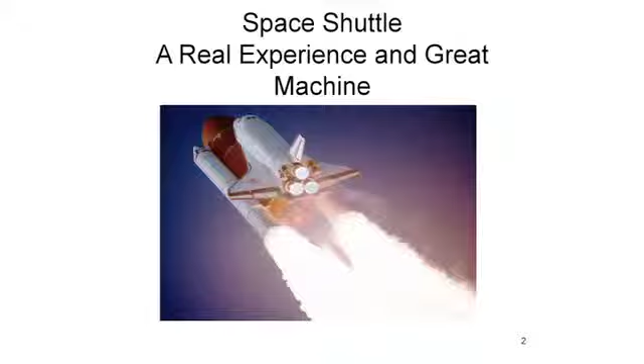This machine is absolutely fantastic. And the big part is to have worked on it from sketchpad to launchpad was the experience of my life. I never told anybody this, but the last 2 years I would have worked for free because I had the honor of starting it in 1969.

And it was each one of the phases, so I'm going to talk to you a little bit about each one of the phases and how important that is and how they're all different.

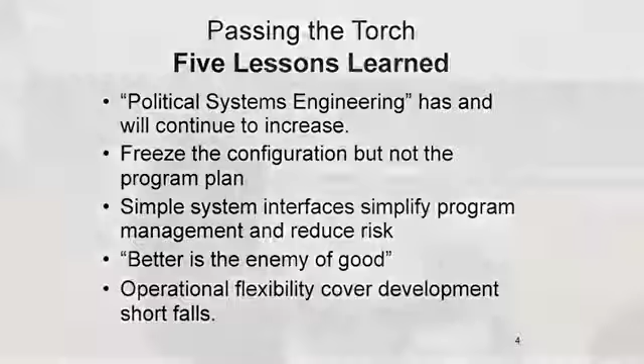Then I'll talk about each one of these 5 things: freezing the configuration but not the program plan; simple interfaces really simplify the program; better's the enemy of good; and operational flexibility covers a lot of shortfalls. Now I'm going to talk about each one of these things.

In the development, transitioning from Apollo to shuttle, there was a huge difference in technology. In Apollo, we just didn't even know what we didn't know. We hadn't even put a man in space. Shepard had gone up and touched the edge of space when Kennedy said we're going to do it. There was so much - we had propulsion systems, guidance and control systems, we didn't know if people could live in space, we didn't know how to rendezvous and dock in space, we didn't know diddly, okay? But we said we think we can do it, and we did it. So there was a huge technology difference.

In the early shuttle program, we looked at a lot of different configurations. We froze those configurations early in the program, and then we stepped into, okay, how do we make this better by simplifying the interfaces and moving into operations.

In the political and program management, the political environment changed a whole lot. There was not - and this was living in the glory days - I mean, we didn't have oversight and a lot of bureaucracy. It was just go get the job done. We had a lot of support at all levels, and that made the job - I don't think we'd have gotten there with all the challenges we had if we hadn't had that environment to work in.

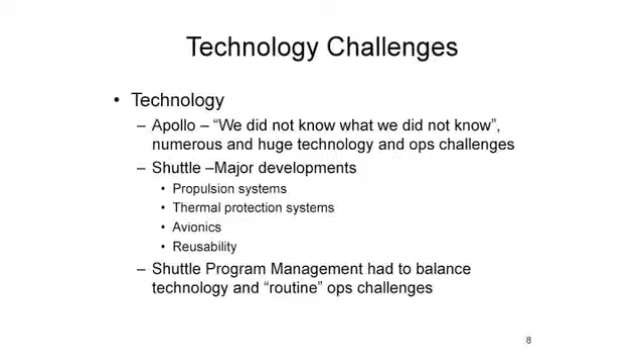But then we had to balance it between something that's a single event and something that's routine ops. John O'Neill will talk more about that.

It wasn't an issue keeping the program sold in Apollo or shuttle, but it was a continuous challenge. One of the big differences between Apollo and shuttle was that Apollo had things happening all the time. There were launches, failures, events. The public could see it, and it was exciting to everybody. In shuttle, this thing drug along for a long time. We in the program felt great because we were making progress, having design reviews, things were coming about, we were doing subsystem tests and they were working well. But nobody saw that, so it wasn't exciting. We didn't have any gee whiz.

Until 78, I think, is when we did the approach and landing test. Is that right, John? About 78? Yeah, that was a gee whiz. That wasn't in the program initially, but when we saw that orbiter on the back of the 747, it was a good engineering management test objective, but the biggest thing was it was a visible thing that got the excitement going. The program was about to get canceled, literally. We were right on the verge of that program dying. But when that happened, all of a sudden it was, get that thing in space. As a matter of fact, that's what John Yardley said: get that son of a bitch in space, I want that to go.

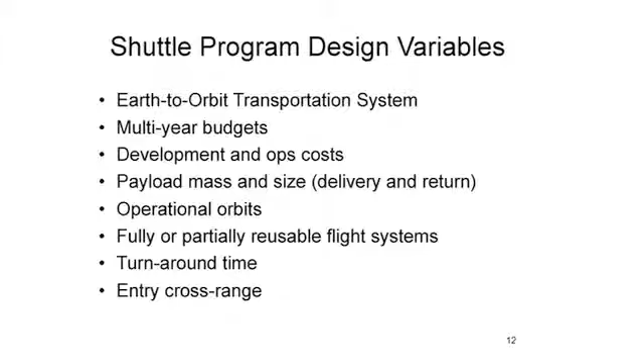So what did we do? We started actually in '69, but there's a 1970 version. We said, okay, this is going to be a reusable system.

Let's look at fully reusable, a reusable booster and a reusable second stage. But we didn't have much cross range on it. So that was one solution.

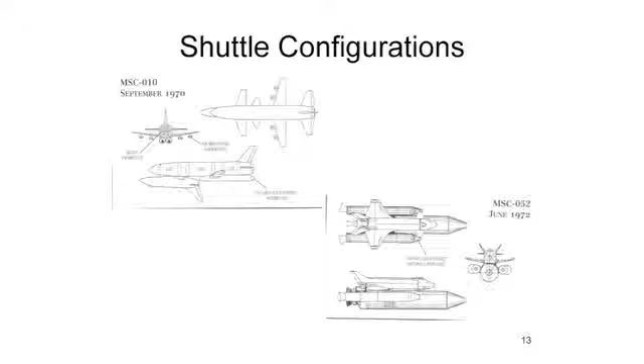We were doing about a configuration a day, literally looking at these things, studying them at a very high level parametric way. And we finally decided in about '72 that this is the configuration as you see it today, almost, okay, not quite.

But that was the baseline configuration which we began the DDT&E in '72. So we studied in phase A and B, when you define a program, it's kind of a rule of thumb that's worked very well in the past. If you spend about 3% of what you think the program is going to cost on defining it, that's about the right magnitude. That's what we did on shuttle, that's what we did on space station, and then you've got something that you can accomplish.

Yeah, there are a lot of hiccups that you're going to have to encounter, but that'll come about. And then we had to balance between the development and operations cost. And that was the big ditty. So we had to throw away the tank, because we couldn't do that fully reusable system. Just the money wasn't there.

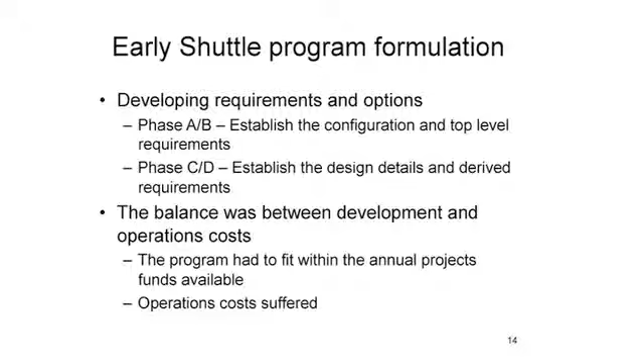The thing is, we did not change the configuration. Shuttle didn't change the configuration. Apollo didn't. Shuttle and the orbiter, which I spent a lot of my life on, we started off with a $5 billion program. We developed the vehicle for $5 billion, exactly what we said.

But bless his heart, Aaron Cohen, he just died in January. My mentor, he could do a lot of things, but one thing he did very, very well is he said no. He would not change that vehicle for anything.

The astronauts would meet with him about once a week at 7 o'clock in the morning. They'd get in before everybody else. They want to change this and want to change that. And Aaron would always say, no, no, no. There was one change that was made other than make work changes.

I mean, we changed valves and fittings and tube structure things, things you had to make it work. But we didn't change the architecture, didn't change the overall design. We put a heads-up display in it. That was the only thing in that vehicle that changed.

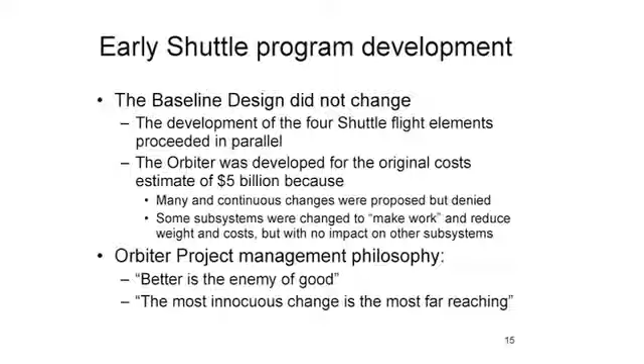And then the other thing was, as part of the change, better was the enemy of good. And I'll tell you a few examples of what we did. We made some changes and they bit us right in the butt. So we said, okay, we're going to hold the configuration, but in about '70, '75 or something like that, we had to make some changes, but we changed the program content. Let me give you an example.

When we started the program, there was a full thermal vacuum test of the forward fuselage of the orbiter. I mean, all systems in it. Crew module, all the avionics, everything else. We're going to do a thermal vacuum test. Same thing on the aft end. We had a full thermal vacuum test. All the propulsion system and everything else was going to be there.

What we did was we said, we're going to have to eliminate those things. But we eliminated them very, very carefully. We knew we could accomplish the mission. We would have to gracefully grow into it by not having those full thermal vacuum tests. We convinced ourselves we could do it analytically, but we had to start flying the missions very benign, as benign thermally as we could. We had 2 full orbiter airframes.

That's on a 747, L-1011, those kinds of aircraft at the time. They always have a dedicated static test article and a fatigue test article. We started the program with a fully dedicated 2 airframes for static and fatigue tests. We ended up with none, okay?

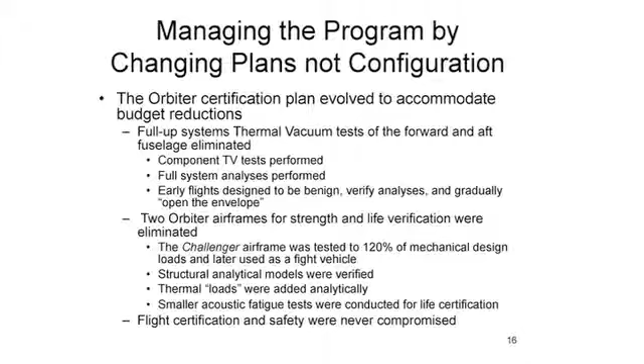We tested the Challenger airframe. That was a vehicle, came off the assembly line. We took it, we tested it to 120% of mechanical loads. We pre-predicted every single strain gauge on that vehicle, 3,000 strain gauges. We said, as we start loading it, this is the way it's going to respond. And if we can do that, then we understand what we have.

So lo and behold, we got it there. We put a pretty good load on it, 120% load, analytical mechanically. We combined the thermal stress with it, which was not insignificant. We said we're ready to fly.

So that saved $100 million in the program, which we got $100 million cut that year. We said we got to save $100 million. So we scratched our head and said, okay, we think we can do that. So there was our test article.

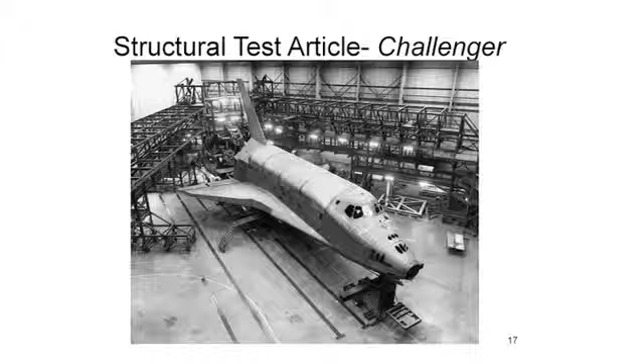Crew module is not in this part. Loading jacks went in that. We pull this off, stuck the crew module in there, and put some tiles on it and flew it. That's oversimplified. But that was the Challenger airframe, and we saved that amount.

Now, we didn't do that easily. The administrator says, oops, I don't trust you guys. So we had all these outside guys come in and grade our paper, and they said, well, these guys, we think they know what they're doing.

On simplifying the interfaces, as we began development of the shuttle at JSC, Marshall had responsibility of the payloads, and we said, okay, tell us what payloads to put in this sucker. Now, this was in 1972. They didn't have any idea. So we said, they don't know, we don't know.

So we looked at all kinds of variations in payload configurations, from mass, multiple payloads, CG forward, everything you can do. We had 10 million combinations of things. We did a Monte Carlo, and we designed the mid-fuselage in '73 to that Monte Carlo analysis. We didn't know where it was going to go, so we put sliding bridges in the vehicle to accommodate that flexibility. So we decoupled the orbiter design from the payload design.

We also put a statically determinate system in there, for you non-structural guys. That means it didn't matter what the stiffness of the orbiter was compared to the stiffness of the payload. If you couple them too much, you have to do an integrated loads analysis, and we said we can't do that. So we simplified that interface.

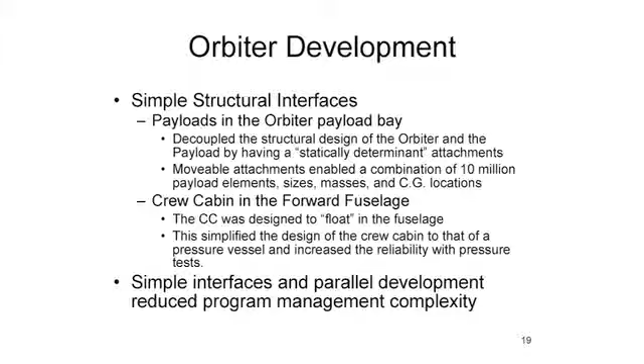In the crew cabin, we had it float. It's attached at hard points, a pressure vessel sitting inside the forward fuselage of the orbiter. We did that so we could separate the loading in that cabin, so it's designed for nothing except pressure and a little bit of inertia loads. We wanted to keep that simple because that was a highly critical area.

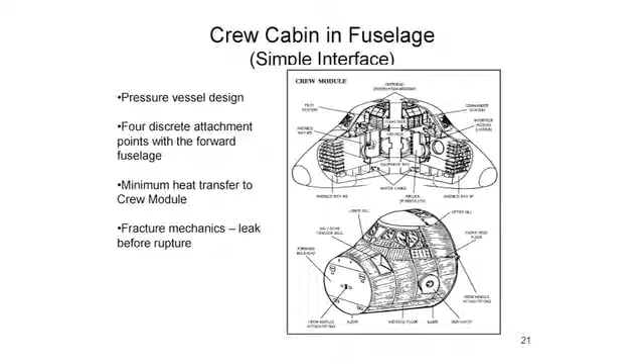That's the way the crew module is attached at hard points here, here, around on the other side, and one down here. So you put it in, bolt it in, and it's almost an autonomous piece of structure. Simplified interfaces let us proceed in parallel.

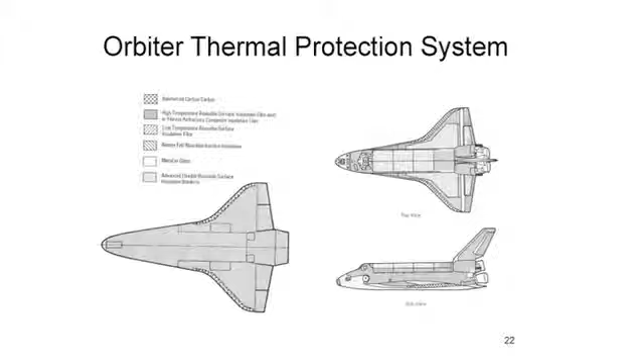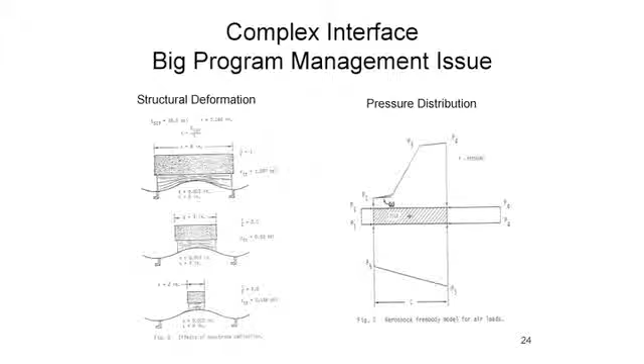Now then, we screwed up here though. The thermal protection system, the tiles, are bonded directly to the skin of the orbiter. Not a simple interface. As a matter of fact, to show you the complexity we got into, as the structure deflects, 90 thousandths of an inch deflection underneath that tile, you lose the tile. Lose one of 25,000 critical tiles, you lose the vehicle. So it was a hell of a challenge, and this was the pacing item in getting the vehicle flying. We had 25,000 of these little suckers to verify we were okay to fly. Well, we got there.

So our simple interfaces were the orbiter to ET. We let the ET do its thing, we didn't have the two vehicles interacting. And I've already mentioned the payload and the crew module, and the TPS to the tiles. Early operations, we had to do a lot of things.

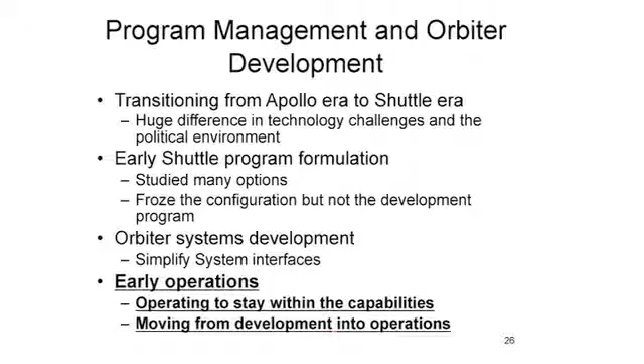In the first flight of the shuttle, in '81, there were two things that were a surprise. One was that, because we couldn't simulate it in wind tunnels, going uphill the pressure on the wing was further aft and outboard. That changed the loading of the wing. We didn't design to that.

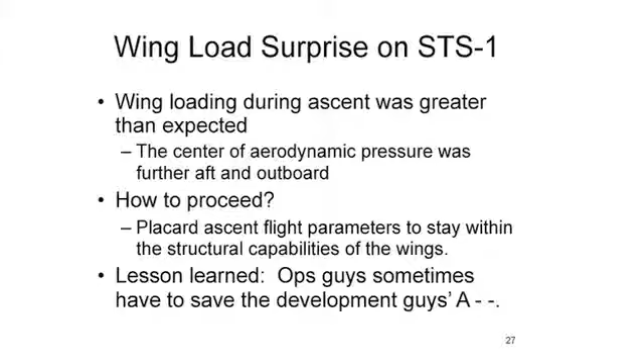So what we had to do was placard all of the flights until we made that structural mod to stay within capability. We placarded it, we learned how to do it, and the development guys think they've got it done. But the ops guys save their ass a lot of times, let me tell you. Because there are things the ops guys can do in conjunction with the development guys to make things work. You've seen it on Space Station. It'll be on every single program. You've got to have that flexibility of accommodating things you don't expect.

Here's another example. I said we tried to never change anything, and when we did, it usually bit us. It was on STS-2, I've got it right there. We had a clog as part of the fuel cell system.

We got debris in the line. We had to shut down one of the three fuel cells and terminated the mission early. So we got back on the ground and said, okay, we know what to do, we'll put a filter in there to keep that material from going down and clogging the line. Well, one filter is good and would do it, but two filters is obviously better, okay?

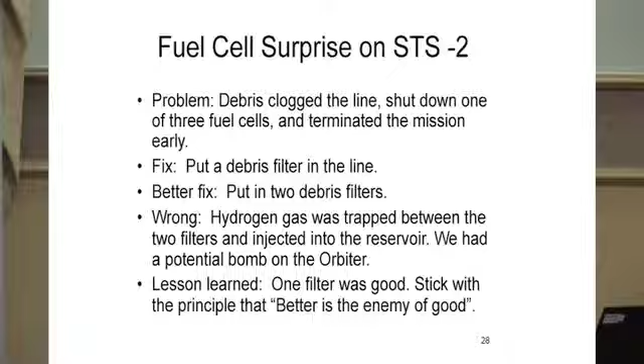So if you put 2 filters in, now you really got a good system. Wrong. Because what we did, we trapped hydrogen gas between those 2 filters. We collected the hydrogen gas in the tank, in the ullage tank. We could have blown up the vehicle like that. So if you have something that works, stop, okay? You don't have to keep going. This was one of the examples of better's enemy of good, and that was the placard we had in the project office. Better's enemy of good, and it paid off.

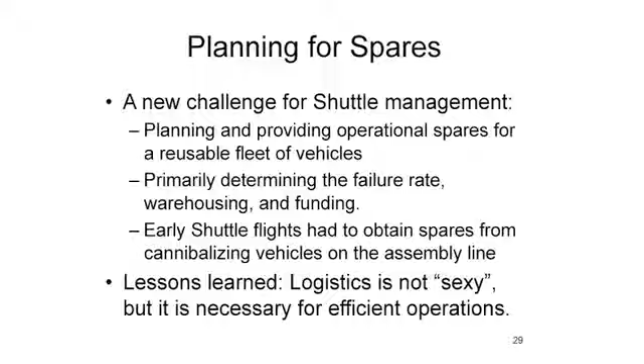A different thing between Apollo and shuttle, and it extrapolates to space station, is spares. Not a very sexy thing, but critically important. The shuttle was up and flying, and the reason it was is we had to, as I said earlier, in '78, once we got a lot of momentum to go get that sucker in space, we kind of pushed aside some of this other stuff, and that was a detriment to the program, and it cost us some things early in shuttle operation. We didn't have, and Russ knows more about this than I do, the spares that we needed at the Cape, but we conscientiously knew we could get by, and then that got fixed. So don't ignore this. It's big.

In the space station program, I woke up one morning early, like about 1988, 89, something like that, and I said, my God, this is the biggest problem we got: the logistics, the reliability, all of the abilities, the supportability, the availability. And we didn't, at NASA, we didn't know that jargon. We had kind of gotten there in shuttle. So I went out and hired some guys from the Army, the logisticians, to come help us figure out how to do this thing, because it's going to be a hard thing.

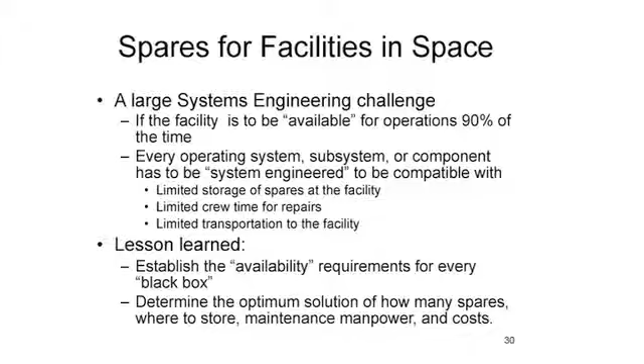What I tried to do, and I don't know if it's still in the program or not, we tried to say we wanted that space station to be available 90% of the time to do science, okay? And that's complex. When you stop and think, I don't care what black box you're designing, you have to think about: is that black box going to work for the entire life of the space station program? Well, probably not. Well, if it's not, then you have to have some spares.

Well, where are you going to put the spares? You're going to put them in space, or you're going to keep them on the ground. If you keep them on the ground, you got to have a vehicle to take them up there. You got to train the crew to change the stuff out. So every black box has got to be systems engineered, if you will.

And that's going to really be true if you have something on the moon or Mars. You better figure out how each little component is going to be available to do its job. You can design the life into it, or you can modify it, you can maintain it, you can spare it, but you better figure it out at the very beginning, or else you'll get to where you want to go, but it's not going to accomplish what you want to. A big challenge, I think, for us.

And the last thing I'd say is get a successful team. I said it was a real honor and a privilege going through all the phases of the shuttle program, and it was another asset, let me put it in that term. We never changed the team. That team stayed in place the entire time, from John Yardley all the way down to a grunt like myself, okay? We stayed, we kept the same guys in there.